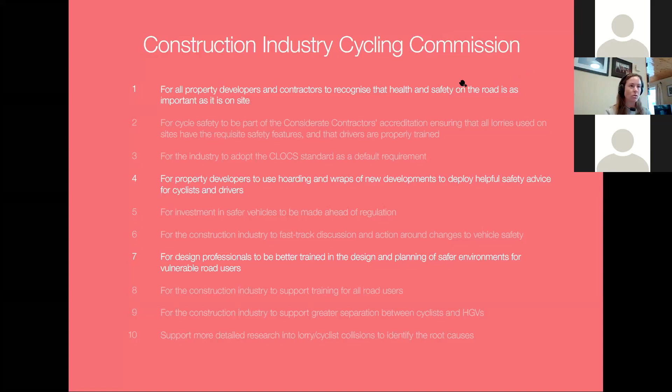The whole basis starts with, it was set up in 2013 in response to the death of Francis Golding, who was a planning consultant, in a cycling accident. Our industry is brilliant for people cycling and for active travel, but unfortunately, associated with that, we've also lost quite a few people to cycling injuries. The Commission would like to try to change that.

They're particularly focused on safety around HGVs, and there are a lot of HGVs in the construction industry, so it's quite relevant. The startling statistic is that only 3.5% of traffic is made up of HGVs, but 57% of cycling fatalities are caused by HGVs. So if you can improve safety around HGVs, you stand to vastly improve the number of fatalities on the roads.

But let's go back to basics. Why design for cycling? I'll apologize in advance - this is particularly, I normally give this CPD to architecture practices in London, so it might be a little bit London centric, but that's not to say you shouldn't give me all of your opinions on other areas of the UK and Ireland.

Cycling is booming in the UK, and there have been a number of reasons for this. There was the introduction of the Cycle to Work scheme. There was the unfortunate 7/7 bombings in London, where a lot of people went and bought bikes because they were scared to go on public transport. There's been the success of the GB cycling team. And now, more recently, COVID - people are being advised not to use public transport, and so the natural safe means is to walk or cycle, to be outdoors.

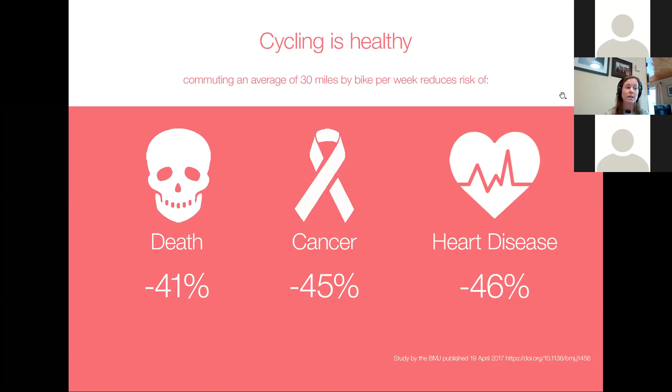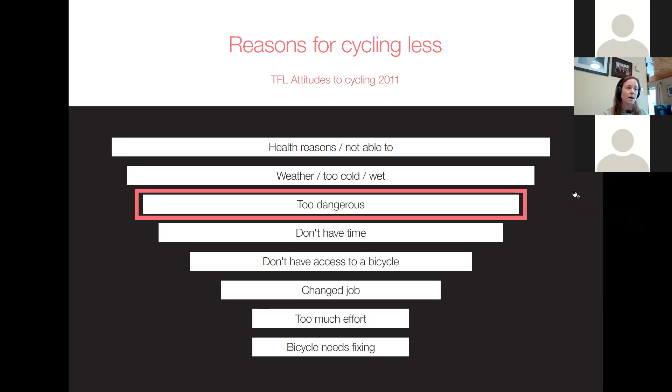We've looked at reasons why people do and don't cycle—this is coming from a TfL study. Lots of things, obviously, as design professionals, we can't control. We might like to, but we can't control the weather. But particularly the things we can control are, in the case of engineers, the road environment and how the road section is divided up between different road users. That will help a lot with 'too dangerous,' to try to make it safer. Infrastructure has a big part to play in making it safer. It's both behavior and infrastructure—they go hand in hand. People need to know how to use the infrastructure, but ideally the infrastructure needs to be there.

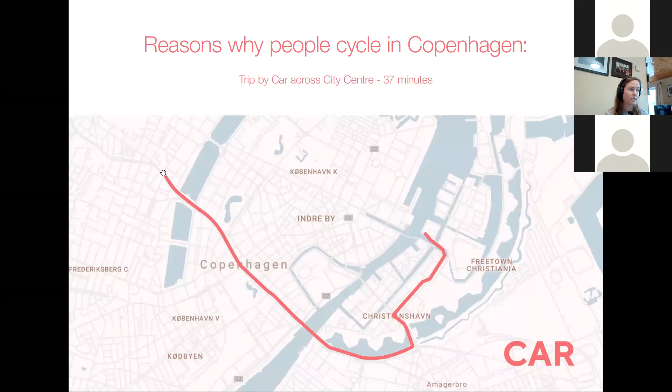We've also looked at why people cycle in Copenhagen, and it's quite interesting because only 1% of people cycle because it's good for the environment. The majority cycle because it's the easiest, fastest, most convenient way to get from place to place. When you look at a journey in Copenhagen, you can start to see why. This journey is a trip by car across the city centre, which takes 37 minutes from start to destination. But if you take the same trip by bike, it only takes 13 minutes. That's a big difference—it's a much easier, quicker route by cycling. And that's what will attract people to cycling.

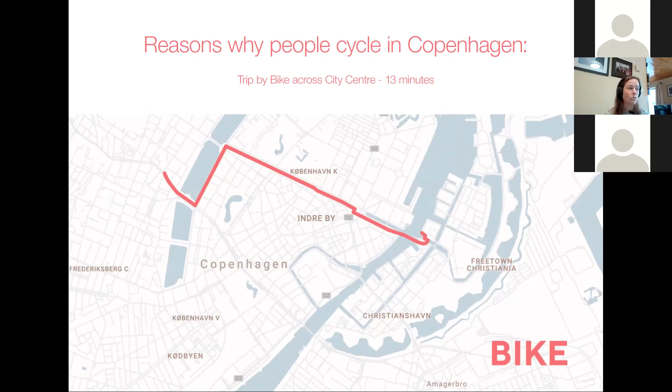Cities have an advantage over more rural towns, where it's actually quicker to cycle. For example, in London, typically a bike will outpace a car through London traffic and through the narrow London roads. So we can pick up on this and use it in designing.

I think there's a bit of an attitude problem in Ireland and the UK with cyclists—there seems to be a lot of conflict between drivers and cyclists. Certainly in the Netherlands, this is not how cyclists are perceived: they don't wear high vis, they don't wear helmets, they wear their normal clothes, especially cycling to work. Even people who race in the Netherlands will have just a regular bike for going to work. And in the Netherlands, it's not gender specific—actually more women cycle than men there.

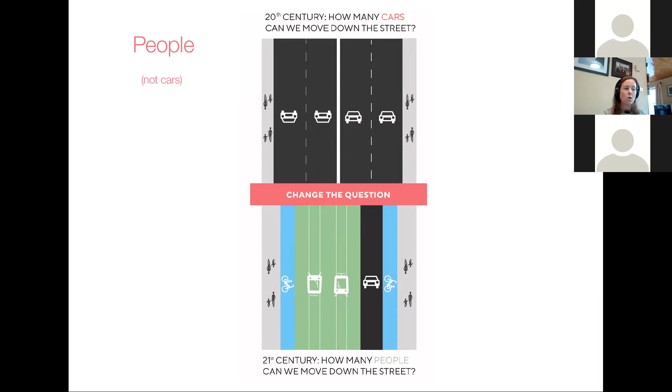But for those people who are worried, the worry is not unfounded. This study was commissioned from a university by the Construction Industry Cycling Commission, and they looked at the most dangerous situations for a cyclist.

Top of the list is where another vehicle turns right across the path of a cyclist. The cyclist thinks they have right of way, and maybe they do, and they're going straight on and don't see a car swerving around to the right.

Or you're cycling along on the inside of a lane of traffic, coming up inside a vehicle, and the vehicle turning left doesn't see the cyclist until he emerges from behind it, going in the same direction, and then a collision occurs. So that's one to watch out for.

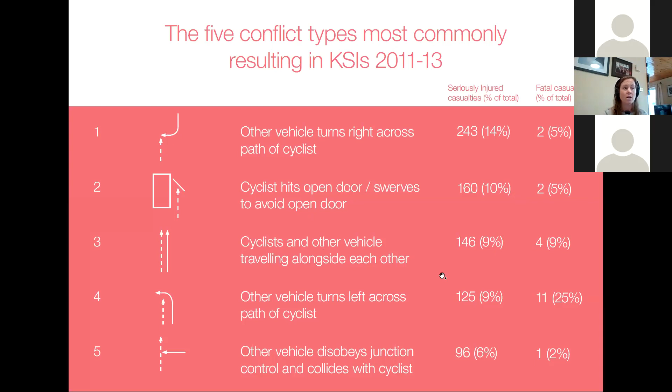So all of these are things that need to be considered when you're designing for cycling, and also when you're cycling - the particular situations where you need to be a bit more careful.

So what can we as design professionals do? Broadly, there are 5 things we can do. This talk is usually given to architects, so I'll try to adapt it a little for engineers, but it's good for each point of view to understand the other.

So I think the first thing is design awareness - I'll give some basic principles of street design, then run through quickly some guidance for designing cycling in.

Points 3 and 4 are quite similar, and these are to do with the CLOCS standards - a set of standards developed by TfL which govern how construction vehicles behave around site. The fundamental principle is that normally the contractor is responsible for health and safety on the building site, but the CLOCS standards put the onus of responsibility on the contractor also for vehicles driving to and from the site.

And that includes things like driver tiredness - you can't overschedule a driver to the point where he's too tired and then he might make mistakes and cause an accident.

And the final point is design ambition. Sometimes when talking about health and safety, it becomes maybe too cautious, and people forget that if you have a really high design quality that allows people to feel comfortable and relaxed, that actually makes it safer, but in a much more intuitive way.

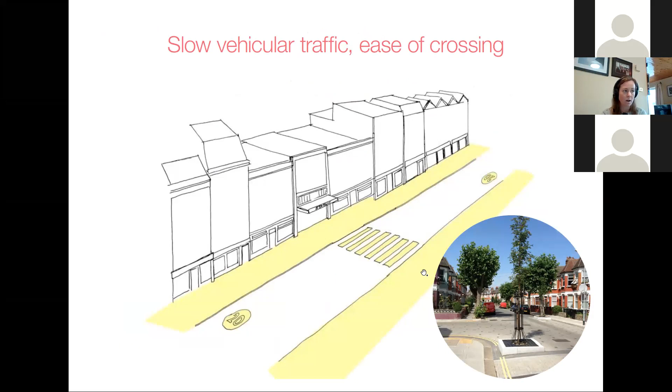So the first one here is street design. You may be familiar with this piece of guidance, developed by Lucy Saunders, but now enshrined in policy, so it's compulsory when designing an urban space. It's a toolkit with a range of items upon which you rate your street or urban space, such as clean air, easy to cross, places to stop, people feel safe. If you score highly on all of those, you're likely to have created a really good street or public space. For example, you would slow vehicular traffic and make it easy to cross, particularly at the point of desire, like here on the entrance to the station.

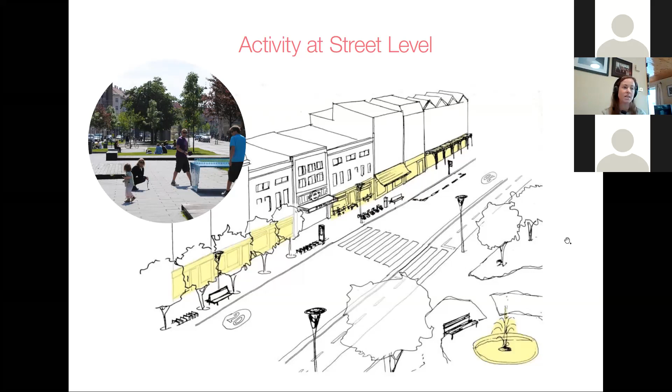Activity at street level is typically spoken about in terms of active frontage in urban design terms, which normally means retail or shops, but it can be something as simple as detail in the environment. The urban designer Jan Gehl, who worked a lot in Copenhagen, studied the speed at which people travel by different transport modes relative to the amount of detail in their environment. For drivers, that would be billboards - more billboards meant drivers tended to drive more slowly because there was more to take in. If you were walking, that could be as simple as the difference between a blank concrete facade and a nice brick facade. As there's more detail in the environment, you become more engaged and walk more slowly, which helps activity at street level and people's awareness of what's happening. In this kind of situation, more people choose to walk or cycle and tend to feel safe and relaxed, which makes for a good environment.

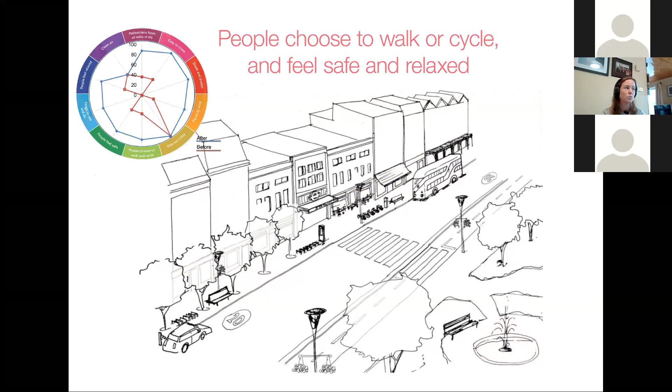These are 5 key principles to keep in mind when designing for cycling: routes should be safe, direct, comfortable, coherent, and ideally also attractive.

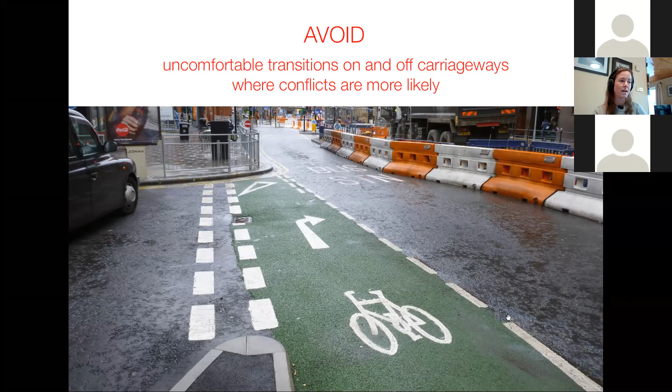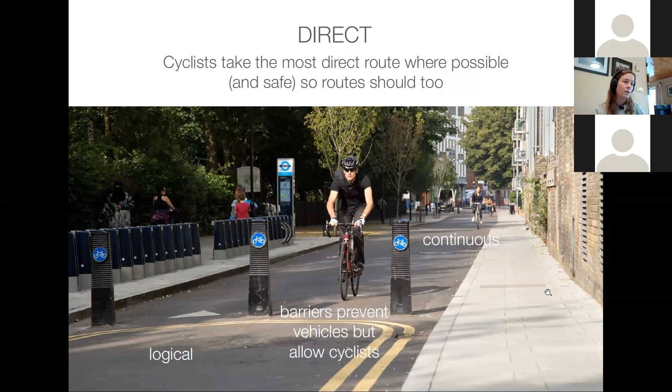Ideally continuous and logical, so that you're not stopping all the time to reroute. This is something to avoid. So here, as a cyclist, if I follow the rules, or follow what the drivers expect me to do, which is to be on the path on the cycle lane, I lose all my rights at this junction because the cars have right of way. So I've got to wait for them to pass. If I'm impatient and I try to go around them, I might bash into another cyclist coming in the opposite direction because I have to swerve around the car.

As a confident cyclist, what I would probably do in this situation is follow the red line. I would come out onto the road where I have more rights, and I can go straight through this junction without having to stop. So a better solution would be to run the cycle lane right across that junction, maybe in a different color asphalt, or certainly with the lining, and push the stop line for the cars further back so that they have to stop for the cyclists.

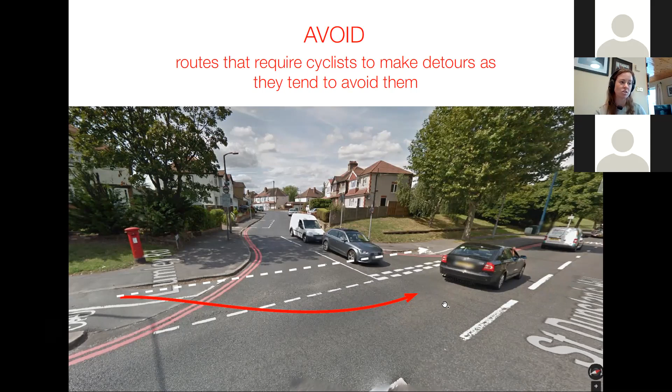Journeys should be comfortable, so they should start and end with easily accessible, safe and protected facilities. The start and end points of journeys are particularly important for comfort. For example, as architects, if we can build in showers, nice changing rooms and drying rooms, it's the difference between someone on a rainy day choosing to cycle or not. Because if I can take a shower when I get to work, I can still look professional for my meeting, whereas if there's no facility like that, I might take public transport instead.

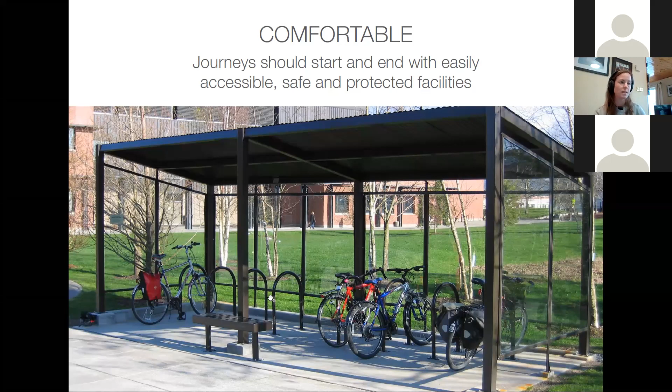Another thing about safety is the point I made at the start: designing for comfort can improve safety, because when you feel more comfortable and relaxed, you tend to be more aware and better able to respond to things that happen. There are a number of ways of doing this.

You've probably heard of the green wave in Copenhagen, a system along one of the main thoroughfares where if you travel at the typical speed of a cyclist, about 20 kilometers per hour, you will get green lights the whole way along this road. So all of the signaling is adapted to suit the pace of cycling rather than the pace of car drivers.

Other things we're seeing in London are advanced stop lines, low-level traffic lights, and cycle early release. These all serve to allow the cyclist to be in front of the cars at traffic lights, so they're very visible, and to move off before vehicles move off, so that cyclists get a chance to start and not impede cars or other vehicles getting going.

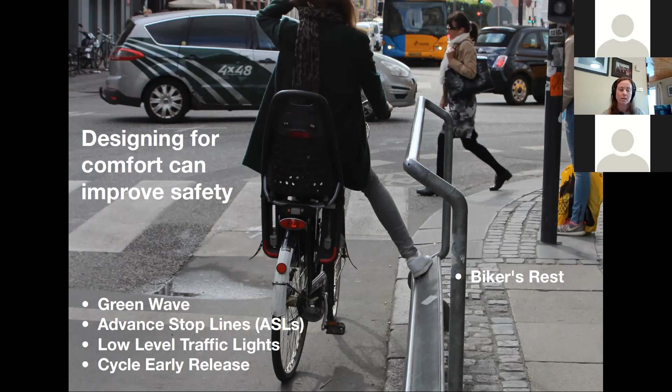Routes should be coherent, easy to understand and easy to navigate, and you can do that using visual hints. The quiet ways in London aim to do this half successfully. But the key point is, if it's quite difficult to navigate, I have to keep stopping to look at my phone to figure out where I should go. At some point I'm going to start being late for my meeting or work, and I'll get impatient. The likelihood then is I'll just take a main road, which makes it less pleasant for me and also more dangerous for everyone.

And ideally, cycle infrastructure should be attractive. This goes back to Lucy Saunders' healthy streets, and also to the fact that the more attractive a place is, typically the more relaxed you feel and the safer it becomes.

So you can imagine if you were cycling along here, you'd probably cycle a little bit slower because the environs are quite interesting. You'd go, do I know anyone at the cafe? Will I stop for a coffee? And also, because the level of the paving is at the same level as the asphalt, you might expect that people will walk across your route, so you'll be watching out for that and being a bit more slow and cautious.

It's also just enjoyable. Where I used to live, I could detour onto a really nice cycle route that was completely off-road and among trees. Although that was a slightly longer route for me to take, I would take that every day because it gave me one or two kilometres of really nice cycling on my way home. So people will detour slightly to use attractive infrastructure.

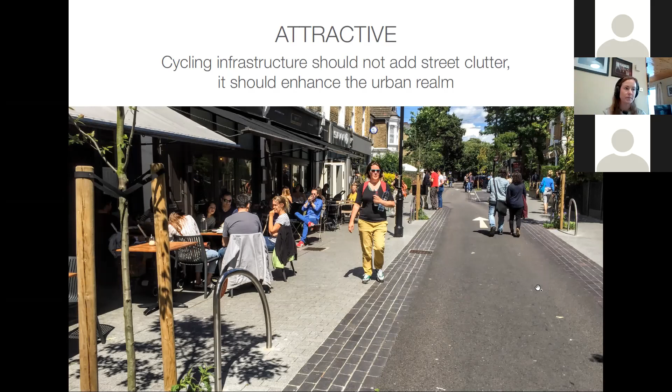So the next topic is to try to design cycling in. I'm not sure of all of your positions, but if you're working in transport planning or civil engineering, you'll often come in contact with clients and you might have the opportunity to influence them. Clients will come in various forms - they might be quite informed and really enthusiastic about cycle infrastructure.

Like Hawkins Brown at the moment have two clients that have requested cycle ramps in their buildings, which is great. You'll have enthusiastic ones who really want to do nice cycle parking, or in their development provide well for cyclists in a master plan. And then you'll also have uninformed or even resistant clients.

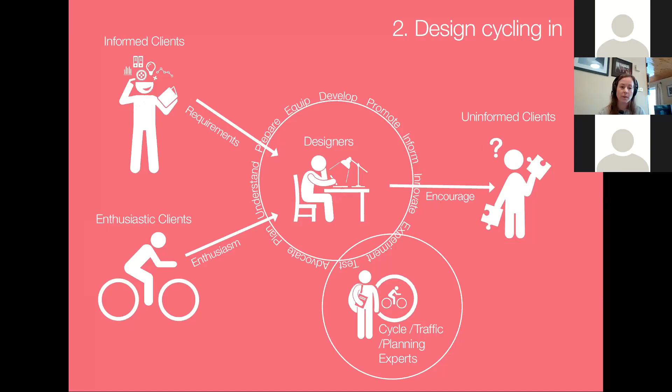So for architects, that's people who are questioning, why do I need to have so many Sheffield stands in here? Nobody's going to use them. And so the guidance, and also BREEAM, gives us a way to encourage and also inform the client of their responsibilities as to cycle infrastructure.

So ideally you want to get that into the brief early on, and that allows you to protect it from value engineering later. And also you can write the cycle standards into tender documentation. Cycling can be encouraged as part of a Section 106 agreement as well.

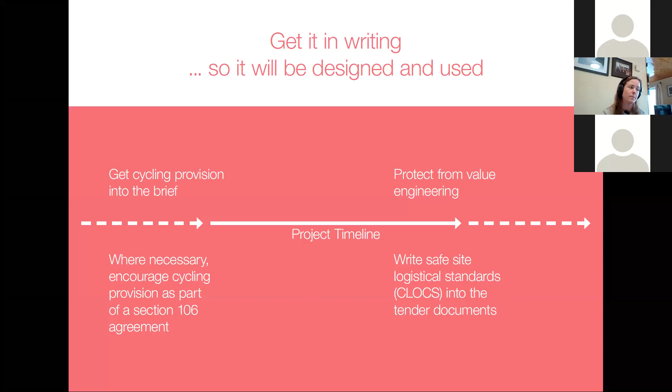This is a brief overview of some guidance. It's particularly related to London, but there is really good guidance also from Manchester, to my knowledge, and in Scotland, and I'm sure in Ireland it's now developing also.

The highway code - a few things are currently in flux due to COVID. So we've had the Prime Minister's strategy, we've had Streetspace for London, and the highway code review, which is still under consultation - you can still respond up until October 27th. And then there's the design manual for roads and bridges and interim advice notes.

So overall quantities for us, for architects, for cycle parking usually come from the London Plan. Then Gear Change was the Prime Minister's recent strategy to encourage walking and cycling. Streetspace has come from Sadiq Khan. Sustrans provide really good guidance, but I'm particularly going to talk about the London Cycle Design Standards.

So this is a 2014 update of a 2005 document, and it's a huge improvement. It's all freely available online, it's broken down into chapters, it's really visual, and it gives lots of options for different scenarios that you might have on the road.

So for example, how you might route a cycle lane around a bus stop without compromising the functioning of the bus stop. It gives different guidance for how you might divide up the street space, and all of them are illustrated and show you how you might go about implementing it.

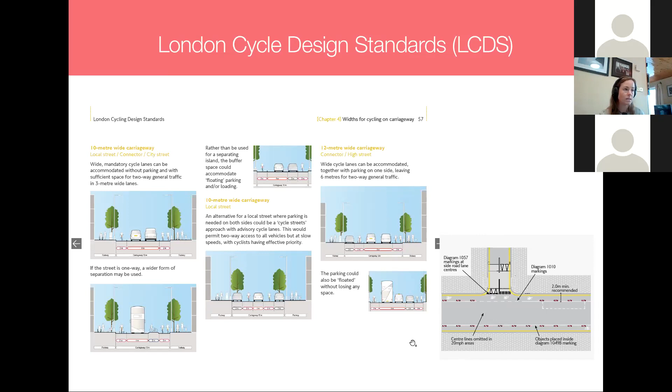But I think the next step for London and for the UK might be to start to learn from other countries. So on a strategic level, Paris - if you've been watching it - the Mayor of Paris, Anne Hidalgo, who's been voted in now for a second term, which is great.

She has a vision for the 15-minute city, which came from one of the universities in France. The idea is that at an urban design scale, you would only be 15 minutes walk or cycle from any of the things that you need regularly in your life, like work or healthcare or grocery shopping or the bakery, which is a great way of laying out a city - it activates all parts of the city, but also allows people to travel by the most economic and healthy means, which is walking and cycling.

The Netherlands is always held up as a good example of the design principles for cycling.

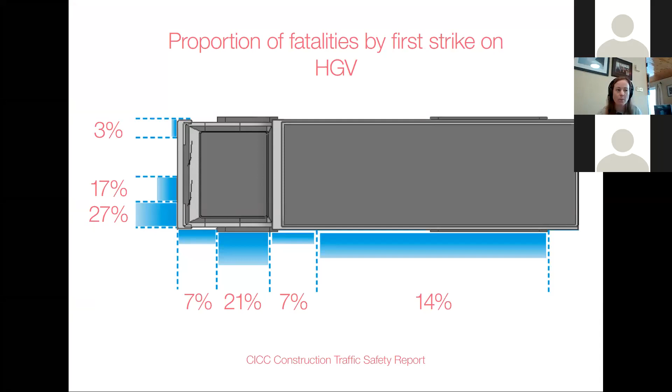The rear of the vehicle is also dangerous, and a lot of this is to do with the high chassis. In high winds, a cyclist can get blown underneath, or something gets caught and they get dragged underneath, and unfortunately the driver doesn't know, so he doesn't stop in time. Really tragic things happen in these situations.

When we looked into it more, we realized very little has changed in the design of HGVs over the past 50 years. HGVs were typically designed to go over really rough ground. There's a demolition contractor on the Commission who told us that now 90% of the time his vehicles don't go over rough ground — he could only need 10% of his fleet with that high chassis. But there's never been an impetus for manufacturers to change their design, except perhaps now with low emission zones forcing a switch to electric vehicles. Maybe, idealistically, that will prompt a redesign of the vehicles in general.

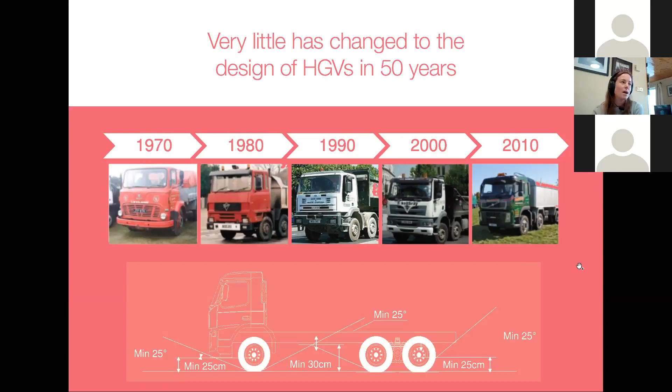But in the absence of that, the Commission has been looking at how things can be retrofitted, or how to just affect the cab.

There are also safety features involving technology, like cameras at various points on the truck, and alarm sounds. While I think they're helpful, they can also be a distraction — if there are cameras in the cab, the driver has three or four screens showing different views, which is a lot to concentrate on, particularly in a busy city, while he's also trying to navigate.

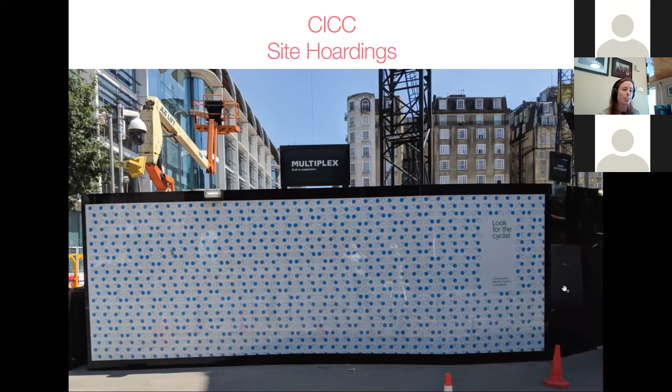And this is the final section, so it's to do with design ambition.

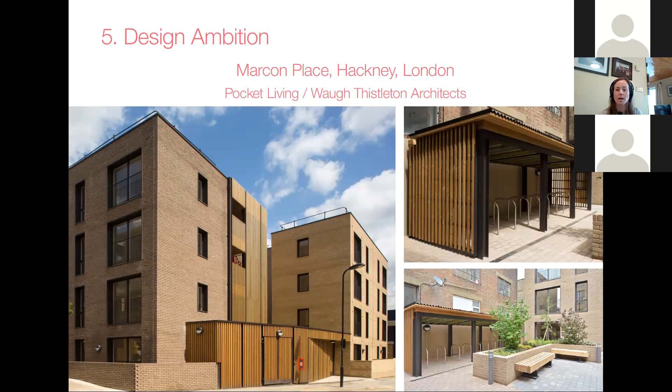I like this example of cycle parking because it works, it's very subtle, but it follows the design language of the rest of the building in the courtyard. It also creates the chance that if you're locking up your bike, you might meet a neighbor in this courtyard. And the fact that it's in a social space gives it added safety in terms of passive surveillance.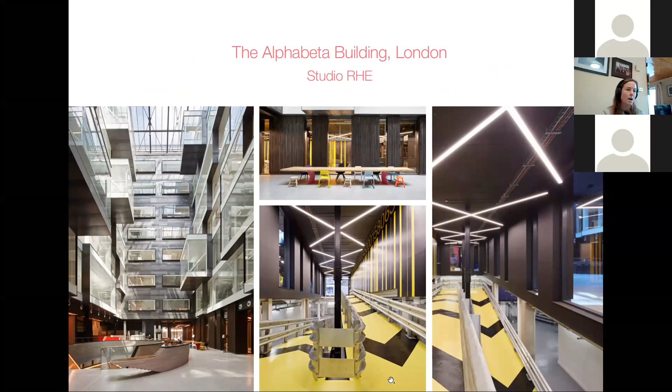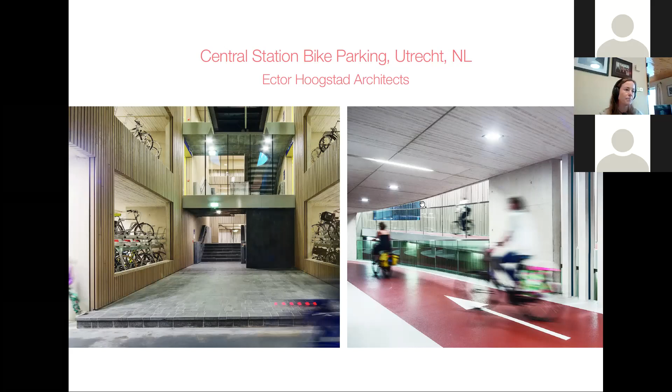So it's a really different view of cycling. People won't have expensive bikes - some do, but they'll generally accept that their bike is going to get stolen at some point, so there's not much point having a really expensive one. You'll see them everywhere outside stations - they might have a nice bike at their home station and a cheap bike at the other end that they just lock outside.